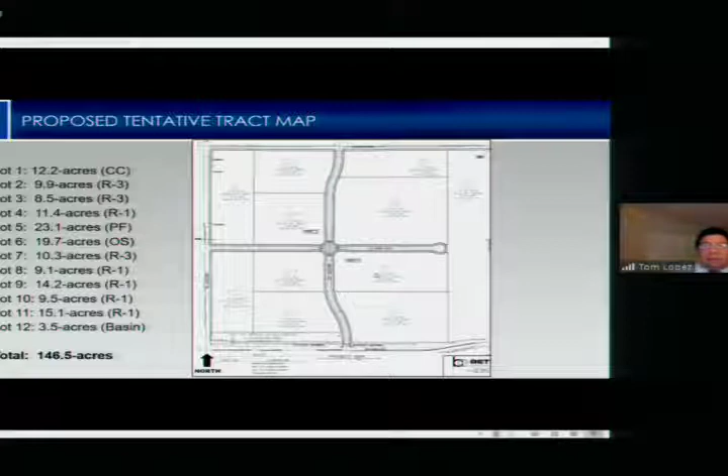And then lot 12 - excuse me, Dana? Am I supposed to be seeing this on my screen? Yes, you're not seeing it? I see you. Am I on the wrong screen, or is it me? Is anyone else having any issues seeing the presentation? No, everybody else has it? Yeah, I do. Okay, I have it. Sorry to bother you. I figured out what it is. Thank you very much. Okay. Thank you, worried me for a second.

All right, so anyway, I was going to talk about lot 12. Lot 12 is at the southwest portion of the property, dedicated for a future detention basin, about 3.5 acres. No development is proposed as part of this project.

Any future development of the site would require planned development permits, as well as additional tract maps to subdivide the lots further for development.

This is the site circulation plan, from the approved specific plan for Area 5B. Western and La Brea Avenues would be extended through the site with a traffic circle in the center. New traffic signals would be installed at the intersections of Western Avenue and Battles, as well as Western Avenue and Stowell Road. The existing traffic signal at Blosser Road and La Brea Avenue would be modified to create a 4-leg intersection.

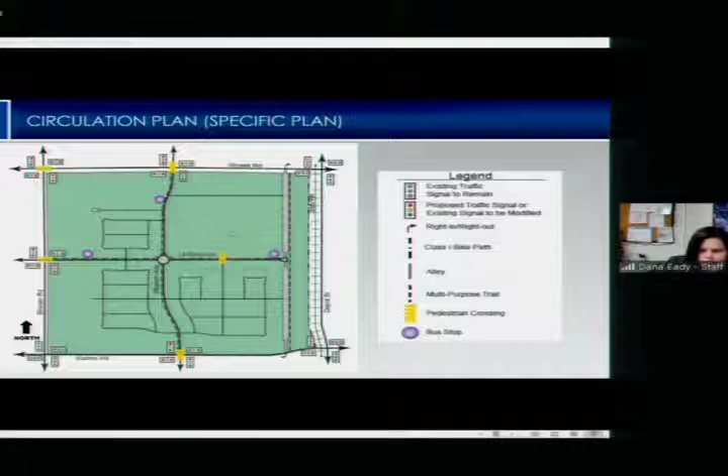An additional signal would also be installed at the intersection of Battles Road and Thornburg Avenue. That intersection is not shown on this map, but it is a requirement per the conditions of approval for the project, as a result of the traffic study that was done.

The new sections of Western and La Brea Avenue are identified as collector roadways within the specific plan. The design of these new roads is shown in this slide, and they include 12-foot wide lanes with 5-foot bike lanes and no on-street parking, consistent with the existing section of Western Avenue to the south of the site.

A landscape parkway and planted buffers are located on each side of the road, separated by a new 8-foot wide multi-purpose trail that will include separate lanes for both pedestrians and bikes. The overall right-of-way width for Western and La Brea for the new sections is 86 feet.

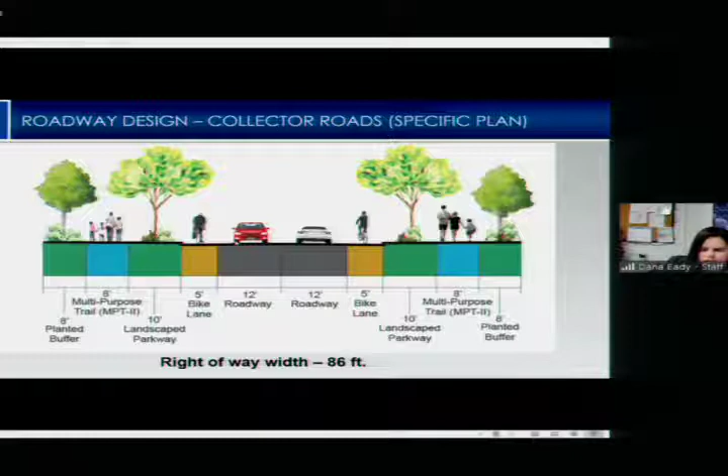These are sections from the tract map for Western Avenue, consistent with the requirements in the specific plan I just showed. You have an 86-foot right-of-way overall, 12-foot wide lanes with 5-foot wide bike lanes, a 10-foot parkway, the 8-foot wide multi-purpose trail, and an additional 8-foot wide landscape buffer on each side. That's the same for both Western Avenue and La Brea Avenue, shown in this slide.

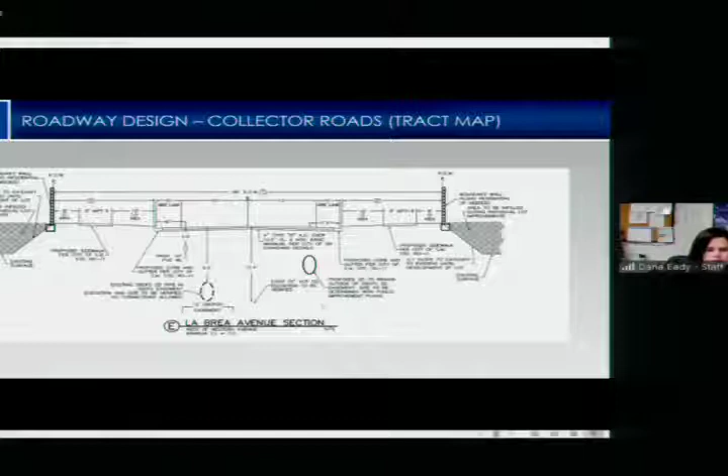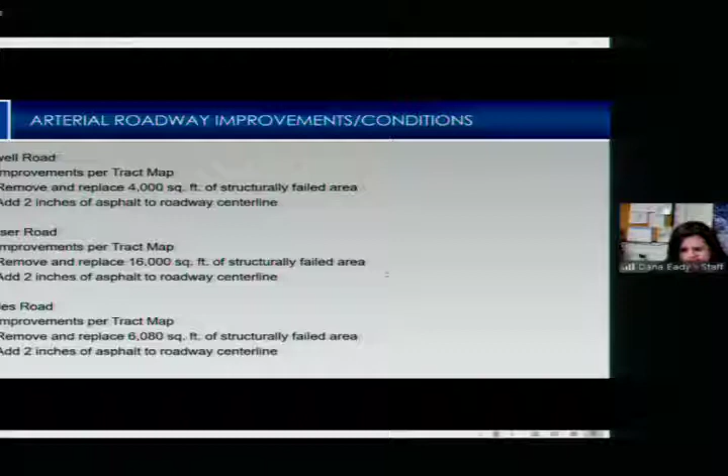In addition to the new sections of Western and La Brea, the project conditions of approval also include improvements to 3 arterial roadways—Blosser Road, Battles Road, and Stowell Road—that border the site. These improvements include those shown on the tract map, such as sidewalk, curb, and gutter improvements, along with widening the road in some areas.

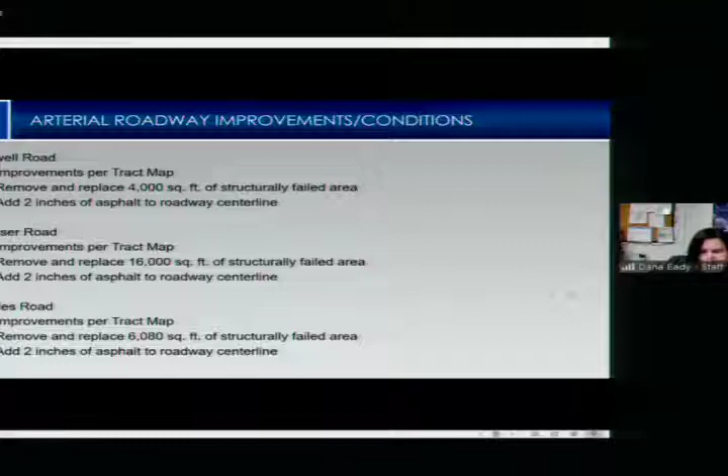As part of the overall required frontage improvements for this project, the Public Works conditions of approval include requirements to improve some areas of these existing roadways that are currently experiencing structural failures. Prior to this hearing, Public Works staff surveyed the roadways, identified the structurally failing areas, and determined what improvements are necessary to bring these sections up to city standards. The requirements are shown for each of the 3 roads and have been incorporated into condition number 11 of the conditions of approval.

I'll be presenting those changes in the last slides of this presentation. To quickly go over them, each road requires a few sections to be replaced, and those areas are called out on the slide. Each of these roadways also requires an addition of 2 inches of asphalt to the roadway center line, just on the side of the road adjacent to this development.

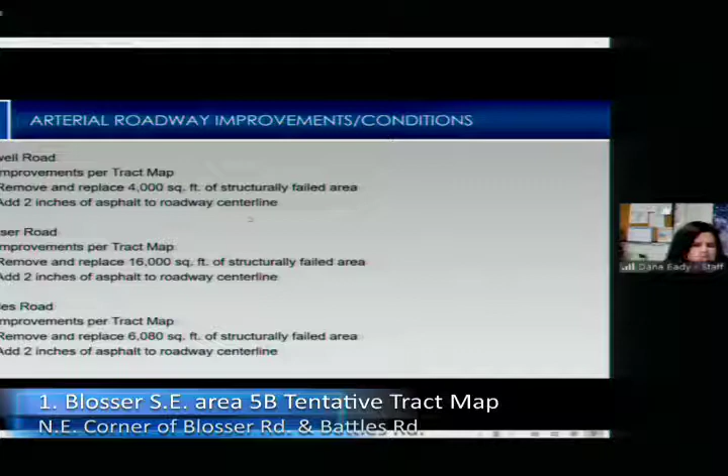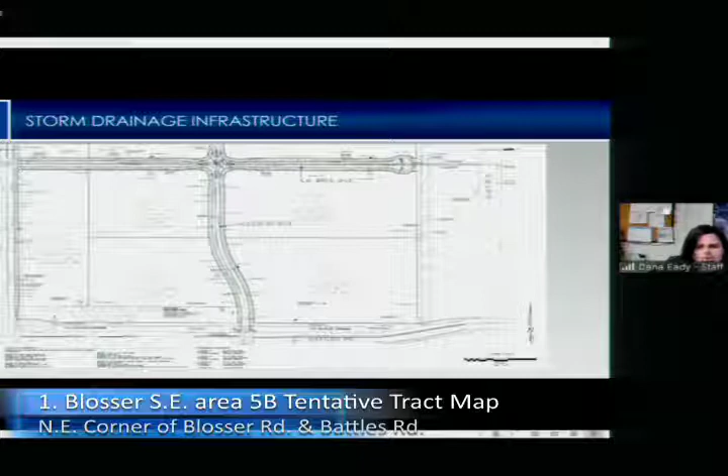Storm drainage infrastructure includes a new 3.5-acre detention basin located on lot 12, shown here in this slide. The basin has been sized to accommodate runoff from future development of the site and has been reviewed by both the city and Santa Barbara County Flood Control. The existing Battles channel, located along the southern boundary of the site, is also proposed to be improved as part of this project. The next slides will include the proposed improvements for both the detention basin and the Battles channel.

For the detention basin, the conditions require the developer to provide a final drainage report demonstrating that the basin has been sized to meet both City of Santa Maria and Santa Barbara County Flood Control District requirements. Both Lot 12 and the basin are conditioned to be privately owned, with the city maintaining the landscaping of the basin as well as the stormwater runoff capacity, including desilting the basin as needed. The developer or landowner would be required to maintain the storm drainage infrastructure as well as post-construction performance and monitoring requirements.

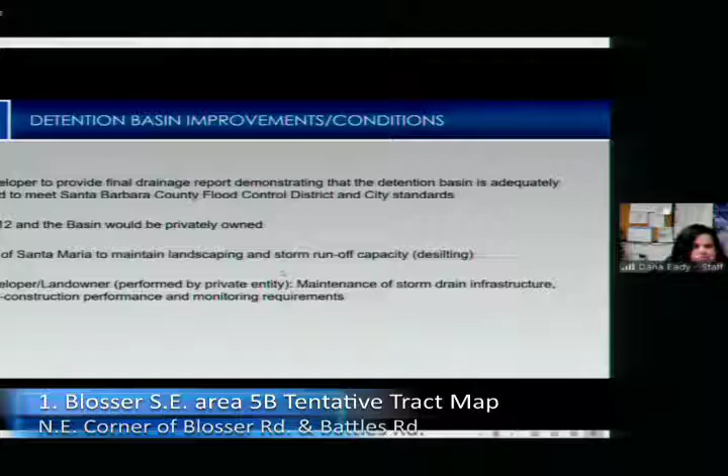For the Battles channel improvements, the developer is required to improve the channel in accordance with Santa Barbara County Flood Control and City of Santa Maria standards. The design would include a buried conduit with a landscaped surface swale, and these improvements could include a walking trail on the landscaped area. The developer, per the conditions of approval, is required to fund the improvements through an agreement with the City of Santa Maria, involving 3 steps.

Step 1 requires a hydrological analysis and a conceptual design. Step 2 is the final design of the conduit and the swale system. Step 3 is construction and inspection of the buried conduit and the swale system.

For operation and maintenance of the channel, the underground facilities would be operated and maintained by Santa Barbara County Flood Control. The surface improvements, including the drainage inlets and connector pipes, would be maintained by the City of Santa Maria.

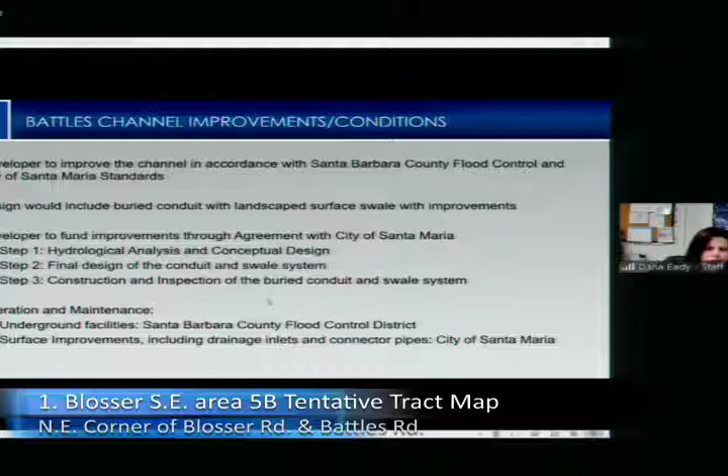As mentioned previously, we do have some proposed revisions to condition number 11, which I'll go through in the next slide. There's a lot of language on each of the slides, so it may look overwhelming, but I've underlined the changes, so I'll just walk you through those.

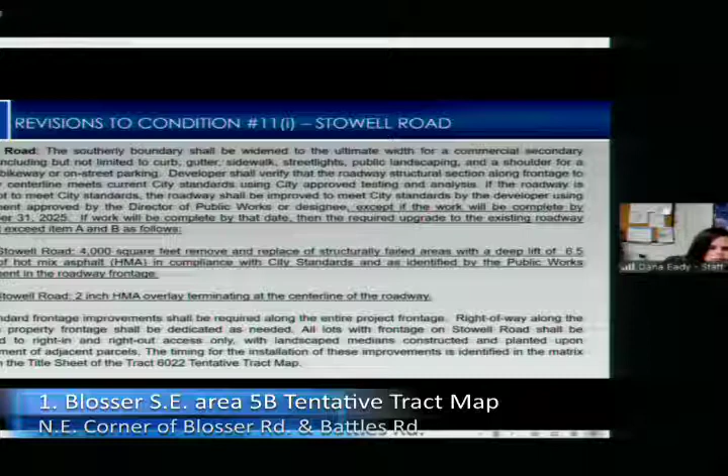So this is condition 11I, and it's I, J, and K, which we are proposing changes. This slide has it underlined, stating that the work identified that needs to be completed to the sections of roadway, provided that it's completed by December 31st, 2025, is what would be required in items A and B. If the work is not completed by that time, this portion of the condition would not apply, and the applicant or developer would just be required to meet city standards. Public Works added this language to clarify exactly what is needed within the next 5 years.

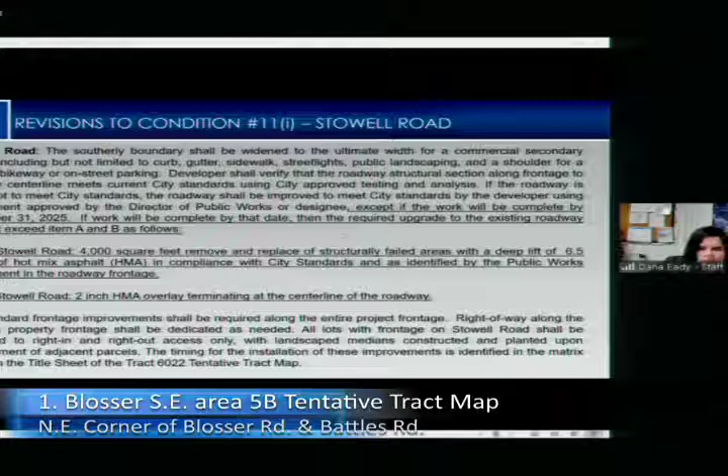This same change is made for Stowell Road in this condition. This is the same change for Blosser Road, which is 11J. And then the same change for, sorry, this one's actually for Battles. Excuse me, that is mislabeled, but 11K is for Battles Road.

So with all of those changes, staff recommends that the Planning Commission by resolution conditionally approve tentative tract map TR 2019-3. I would like to mention that we have Mr. Mark Mueller from Public Works available to assist with questions. We also have Mr. Scott Christian from Rec and Parks, as well as the applicant here to provide any comments they have.

Before I forget, we did receive a comment letter from the applicant, and I sent that out to the commission, and it's posted online with some concerns regarding some of the project conditions. We also received a letter from the Santa Maria Valley Railroad, which outlines some improvements they would like to see to an adjacent railroad crossing. Thank you, that concludes the staff presentation.

Thank you, Dana. I don't know how the rest of the commission feels. Would the commission like to hear from the applicant? Because it seems like the items brought to the attention in the staff report, as well as some additional items that are part of the letter sent by UPC. Would the commission like to hear the presentation given by the applicant first, or would the commission like to ask questions of staff?

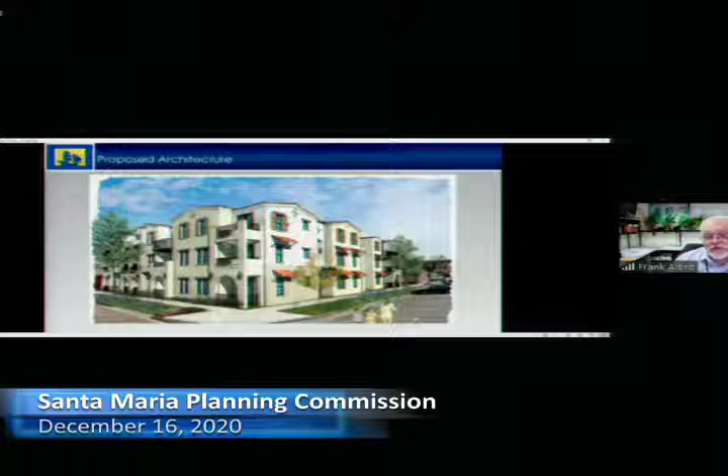This is clearly a Spanish mission style aesthetic, with wrought iron on the roof lines, decorative vents, Spanish tile roof, shutters, deep windows with heavy mullions and sills, and awnings at the second and ground floor levels. You can see wrought iron decorative detailing on the balconies and ground floor patio areas, light fixtures that follow the style, and colors that accentuate the Spanish aesthetic. There are also some hidden features, decorative arbors and awnings over certain portions of the building.

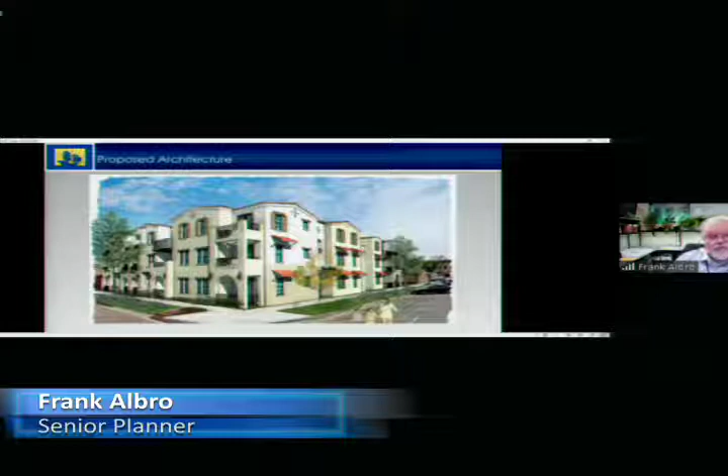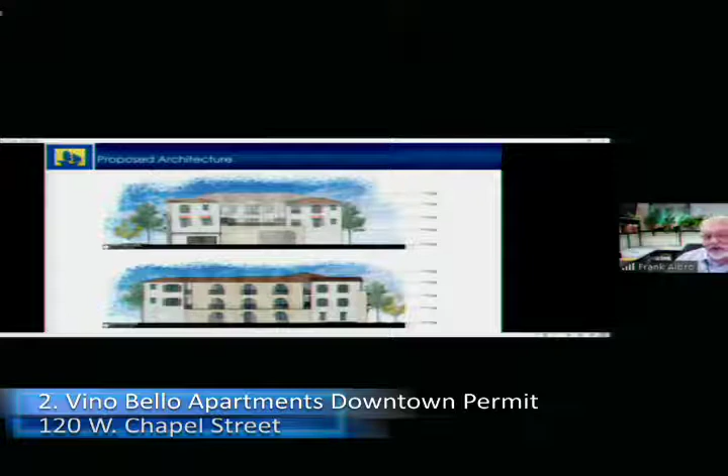So here's the south elevation, and you can see where some of the under building parking is available here. Here's the refuse enclosure, and here's the east elevation.

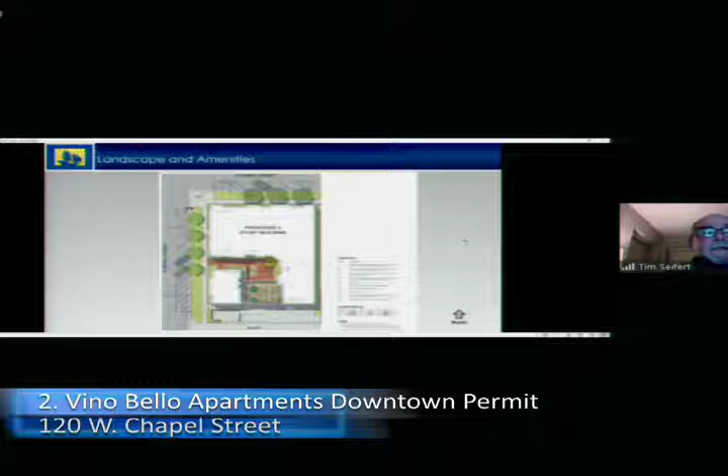Thank you, Frank. Does anybody in the commission have questions of staff? Commissioner Seifert, go ahead. Thank you, Commissioner Blanco. So, Frank, I don't remember that setback being back. I thought at the study session the building wasn't up to the street on both sides? No? So that's a new elevation? The elevation you just went through is new also?

Let me answer those questions. So this is the site plan that was proposed at the study session. Since the study session, they've added this one additional parking space on site, for a total of 7. Part of the conversation at the study session was an encouragement for the applicant to try and find more parking on the site. So what I had done was go back to their original proposal when they originally submitted to the planning division for this project.

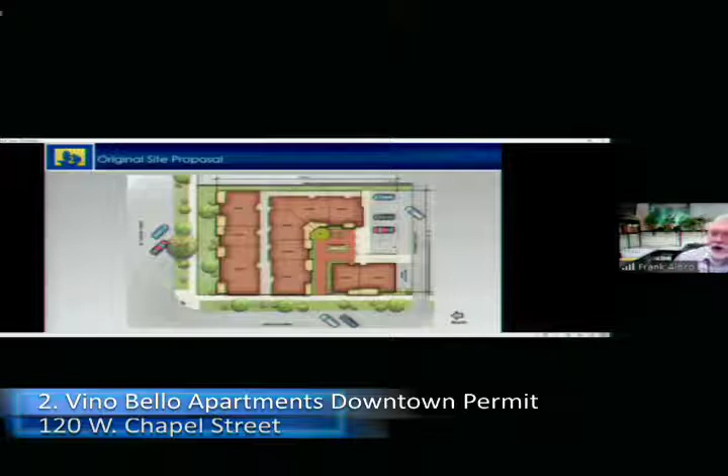This is the plan that they had submitted. Knowing that 5 spaces was very few, staff, city, myself, encouraged the applicant to relook at the plan and consider ways to provide additional parking on the site. So what you're seeing here is the very first submittal to the planning division, and part of our comments were, we'd like to see more parking on this site. That's why I felt it was important to show this, to show that the applicant has been working with the city and has modified their original proposal to provide this kind of parking configuration and enable them to get more parking on the site. However, providing this configuration and more parking necessitated them to move the buildings further north.

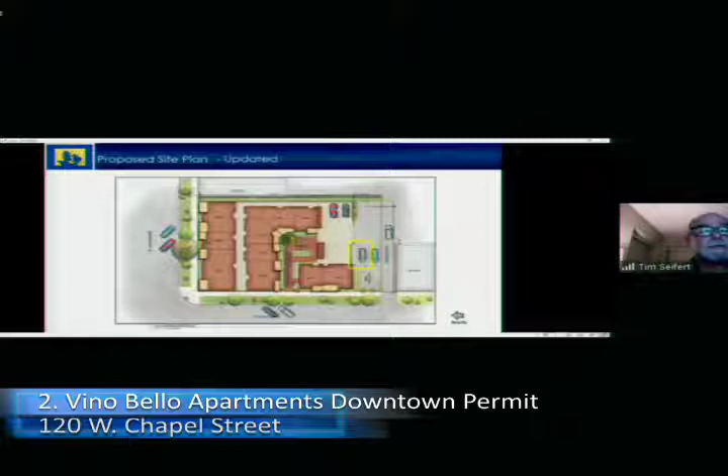Yeah, I don't have an issue with that. That reduced the setback. So on the washer dryer room, that's completely up to the owner as far as I'm concerned, but it looked like 1 washer and dryer per floor. I believe it's 2, a set of washer and dryer per floor.

Okay, but I defer to the applicant for comments on that. Well, it's his building and he's going to rent it out. It would seem like you'd need a few more washer dryers. I'm hoping that if we do see this through and allow the parking the way it is, if he's taking up more of his property with rentable product, it would be nice if the rent reflected that. Obviously I have no control over that, but we're looking at getting younger people with less money, and we're hoping no cars, because for 5 years you've told me we don't allow on-street parking, and now we only have on-street parking.

I understand where we're headed with it, but I just hope the rents are adjusted accordingly for the lack of parking, since he's got more building there than we would normally allow. Other than that, that's really all I wanted to ask about those two items.

Thank you, Commissioner Seifert. You bring up a good point that I'd like to reiterate. I made this point at the study session about parking. Typically for most locations within the city, on-street parking is to be ignored, essentially. Our code does not allow us to credit on-street parking towards a project such as this.

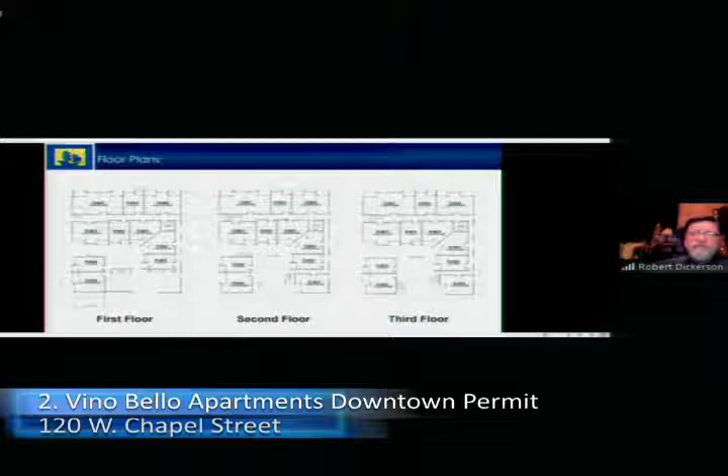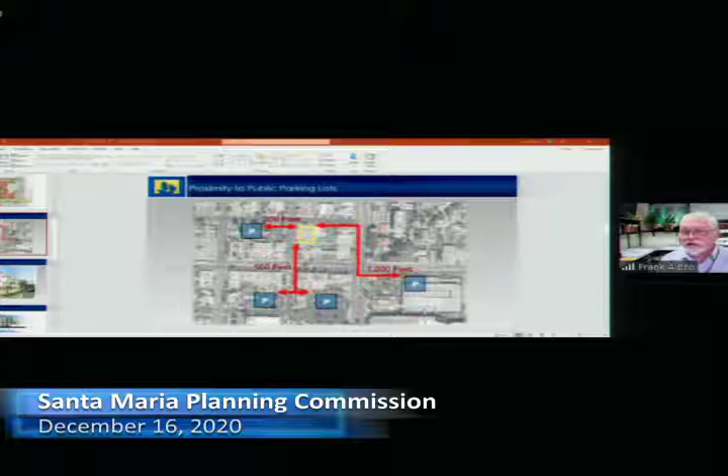So the parking incentive map generally looked at most of the sites within Zone A being within 700 feet of a public parking lot, and therefore that public parking should be credited essentially towards the parking for the uses that go into this core of the downtown area.

So for commercial, assembly, any other use other than residential, the downtown plan determines no parking is required within Zone A. However, for residential, it does say a quarter of a space is required for apartments less than 400 square feet, half a space for units 400 to 600 square feet in size, and one space for units more than 600 square feet in size. Which does bring me to another point.

I know in past commission meetings there have been discussions on parking, particularly with multifamily projects, and many of those projects had multiple bedroom units and larger units. The units for this project range in size from 400 square feet up to less than 1,000 square feet, but those are only a couple of the units. Most are studios, actually slightly under 400 square feet. Part of the concern in past hearings has been that an apartment with 4 bedrooms might have 4 adults living in it, one per bedroom, leading to at least 4 cars. For this project, because the units are so small, that likelihood is reduced. You're probably not going to have a number of adults living in a 400 square foot unit, so some of the concerns with other projects are alleviated with this one.

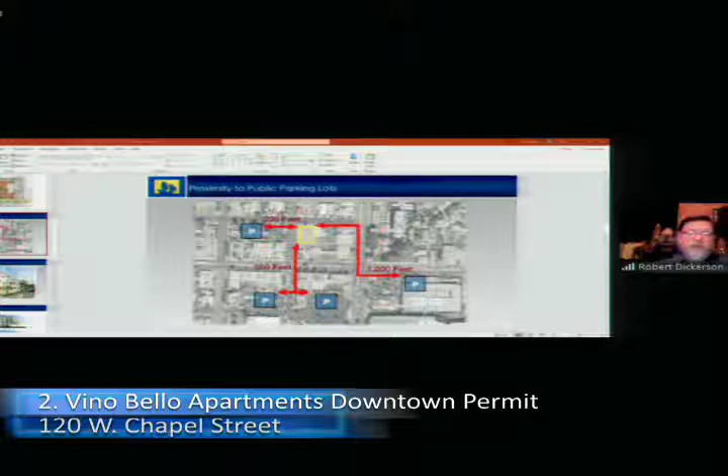Frank, as you alluded to, there's that one parking area that's mostly going to be turned into a park with some parking, which I'd assume ideally is for the park itself. Can we go back to that? Yes.

And then there were the 2 lots in Town Center West, as well as the parking on Town Center East. I can't remember if it was Commissioner Seifert or who brought it up, but aren't some of those spaces, in essence, up for bid for turning them into something other than parking? They exist as parking at the moment, but it's a little disingenuous to say they really should be credited for parking given that we're looking to sell them, right?

Well, the situation this project finds itself in is that they've been working with city staff for more than a year now developing this project and relying on what the downtown specific plan tells us we can do. The downtown specific plan specifically identifies those parking facilities within the parking zone map as being available for downtown uses. And yes, I agree it's a bit of kabuki theater, isn't it? Because the applicant is one of the people bidding on one of the pieces of property we're trying to sell. Sure, well the applicant is relying on the downtown planning, and those projects did come along after the initial submittals for this proposal.

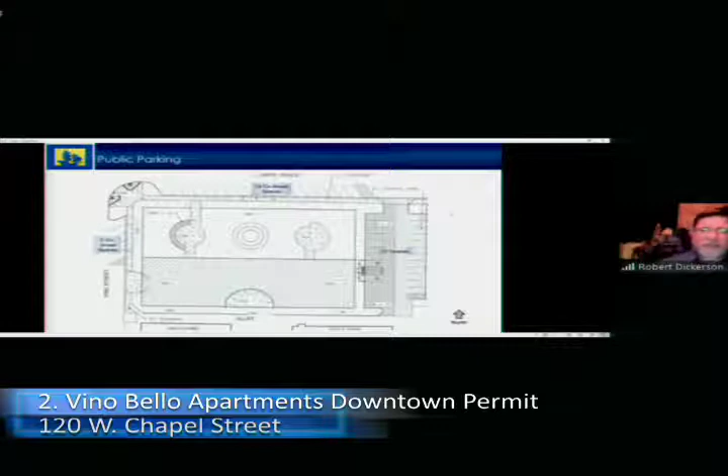However, even without the Town Center West parking lots, you still have the on-street parking. The applicant has provided a graphic depicting the number of on-street parking spots within the 2-block area of this plan, so there's sufficient on-street parking immediately adjacent to this project. And there's the parking lot with 25 spaces that will be converted but will still have those 25 spaces available. Bottom line, staff feels comfortable with the parking available even if you were to take those lots out of the mix, and staff is comfortable that it meets requirements for downtown.

Yes, it meets the intent of the downtown plan. The applicant has gone through iterations and has done their best to increase the number of parking spaces on the site. There's available adjacent on-street parking and in this parking field, all of which leads to part of the recommendation of staff, which is that the Planning Commission approve the project.

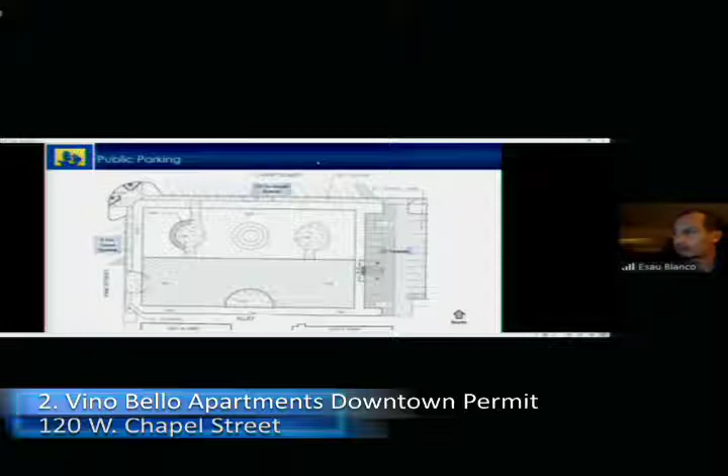I see a raised hand, Ms. Rayner. Thank you, Vice Chair Blanco. Can you also make sure that Scott Martin has audio availability? I think I do. Thank you. Awesome, can hear you clearly, yep.

Perfect, thank you. Thank you, Frank, for the initial staff presentation. We'll try to keep it short and sweet. My name is Rachel Rayner, I'm the project planner from RRM Design Group. Along with me tonight is Scott Martin, project architect, both of us representing the applicant and the proposed project before you. Thank you for your review and consideration, Vice Chair and Commissioners, for having us back here again reviewing the project so soon after the study session on December 3rd, as Frank mentioned. We appreciate the feedback we received that afternoon, and as Frank mentioned, we've incorporated it into tonight's presentation, which Scott and I will overview a little bit more.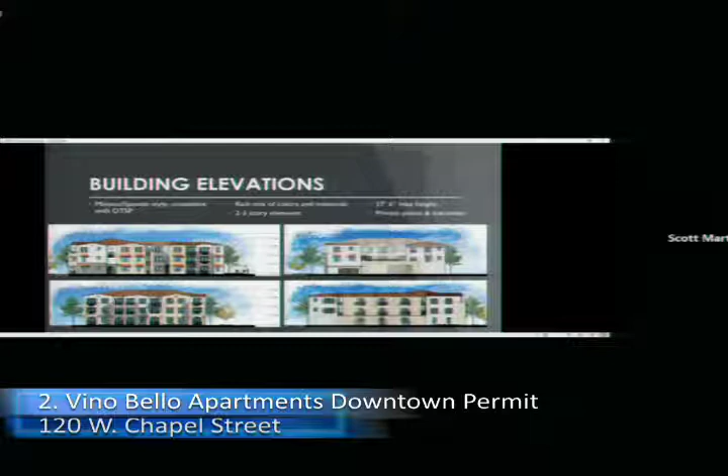This really highlights the bike storage and the laundry storage. We've done a number of multifamily residential projects, and there's certain laundry ratios that we like to use for sizing of laundry. We're right there in the ratio, it's not oversized by any means. So I thought that was a really good catch.

You guys are doing a fabulous job of dissecting these plans. We do have 2 washers and 2 dryers per floor, that's about 10 units per floor. So we're right in that sweet spot of maybe needing 1 more per floor. I think that's something we definitely take into consideration and look for as we move forward. But I do think it's a great improvement having that distributed by floor as opposed to the 3rd story unit coming down. So I also really appreciate the bike storage, and in general think all of that makes for a better project. So here shows the ground floor and the additional parking space as we move through the slides.

You can see that stacks, it's a similar location. I really think getting some of that feedback from you last time just made this project better. Slight modifications with the new parking space and some site constraints as we changed that on the landscape plan. You can start to see the delineation, some of the parking around.

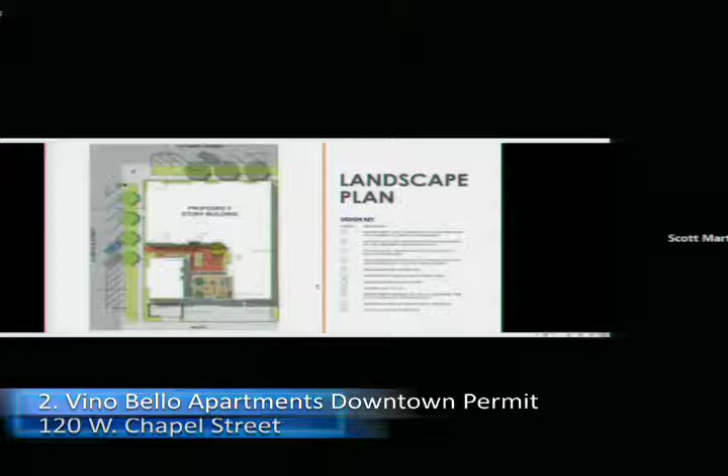Actually, Frank, can you put up the first floor plan? This is so different than being there and just drawing on a piece of paper. I've got to tell you, it's a little strange for everybody.

So right there off the sidewalk - thank you, Frank. That is one ingress and egress point. You can go either upstairs to the second and third level, or walk by the stairs and access the units on the ground floor. For the studio and one bedroom on the plan south, their front doors are on the back side, so you'd walk through the courtyard, or come from the parking area into those two front doors.

Ideally, for a multifamily project, we like this hierarchy of public to private. We like that you can come from the public right-of-way, the street, the sidewalk, go into the courtyard and have a semi-public place where you might mingle with your neighbors, see each other, talk about your day, and then disperse either left to those two units or right behind the electrical room, which also gets you into your circulation to access whatever unit you want.

Then you take the stairs to the upper floors to access that way. Does that answer your question? Those are all pedestrian routes. From a vehicular standpoint, it is only the alley that serves as ingress and egress. Yeah, that's perfect, thank you.

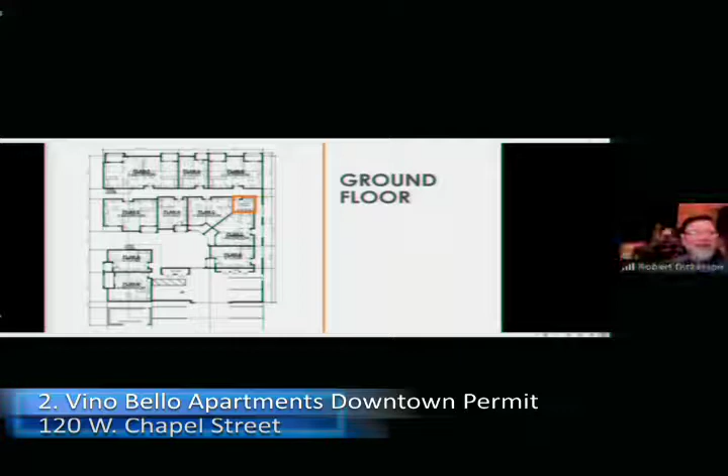I also want to give you complete credit for the snarky comment you made about our agenda item. I appreciate it tremendously, but others might not. I like it, so you get credit for that. I was not looking for credit, but I really do appreciate it. Don't start lying to us now, Scott. I can't imagine being in your position on a normal day, doing this from your house with kids doing stuff. You all deserve a big gold star in my book.

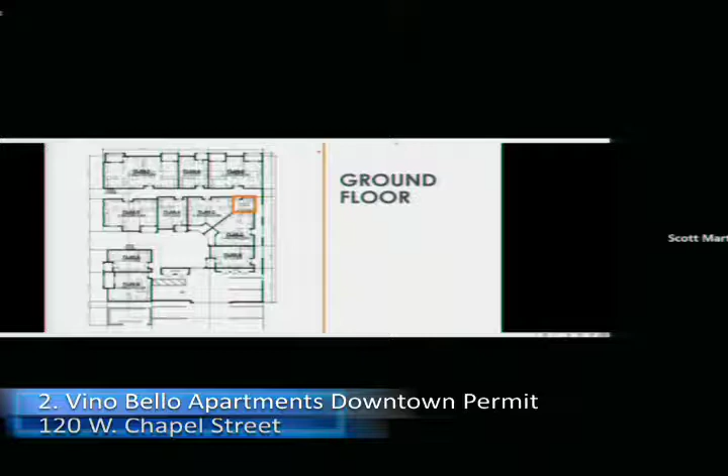Well, thank you very much, I appreciate that. Any other questions of the applicant?

Seeing no others, any other discussion, or does anybody want to entertain a motion? Commissioner Dickerson, Chairman Blanco, I don't believe we've gone to the public, have we? Oh, thank you very much. No, I was going to make a motion, but we should hear from the public first.

And anybody in the public who wishes to make a comment, please raise your hand or dial star nine if you're on the phone. Okay, I am seeing none. Dana, do you have any others? Do you see any that I'm not seeing? No, I don't see any raised hands at all. Okay, all right, we'll close.

We'll close the public comment period and bring it back to the commission for any other discussion or motion. Commissioner Dickerson? Sure, if there are no objections from anybody, and people don't want to make additional comments.

First of all, I like the plan, I like the modifications they made. So with that, I would like to go ahead and make a motion that the Planning Commission approve the downtown permit DD 2020-0017, with the additional on-site parking space, laundry, and bike storage on each floor.